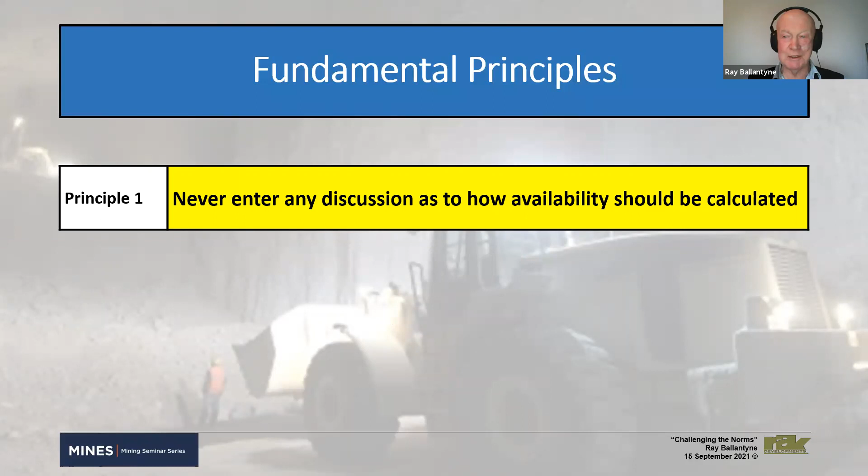With that, we'll get going. People who've worked with me will know I have two fundamental principles when it comes to time usage, availability, and that sort of thing. Principle one is never, ever, ever, ever, ever enter into any discussion as to how availability should be calculated. And principle two, stick to principle one at all times. No, I'm not really joking. This is an incredibly emotive topic, and if we start the conversation we end up all night and not coming to a resolution anyway.

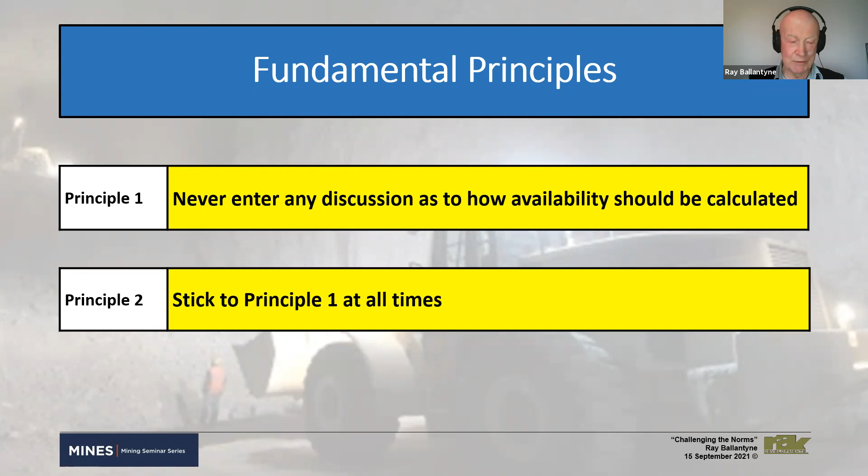So let's look at some reasons why this is such an emotive topic. I think the fundamental one is that we use equipment KPIs to measure people's performance. The maintenance managers are measured on equipment availability. The operations managers are measured on equipment utilization, or tons per hour, meters per hour. So we're using our equipment time usage model to measure people's performance, and that immediately introduces an incentive for people to bias the outcomes of the models.

So they bias the way data is captured. They play with the structure of a time usage model and change formulae for calculation. I don't know how many of you have been through the experience of having consultants come on site and say, oh, we fixed the availability. They just changed the way it was calculated.

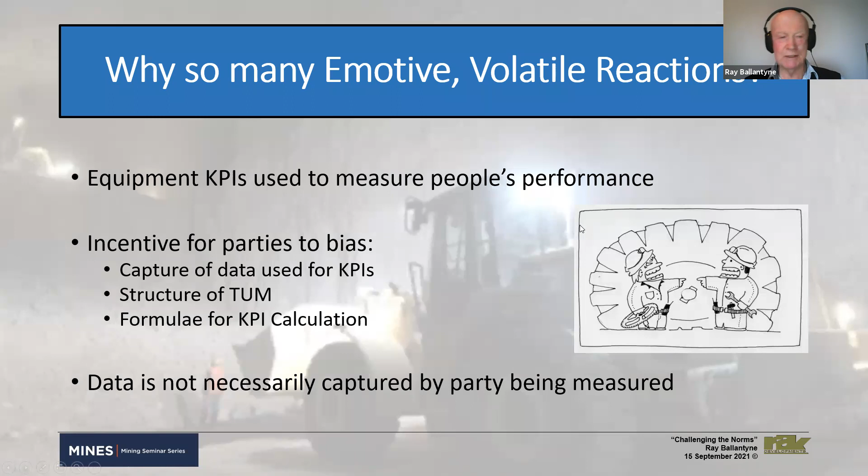And the other big thing is that in many cases, the people being measured by this data don't actually have control of how it's captured. So our poor maintenance man might be measured on availability, which is captured through a mine control room or dispatch system that's been run by operations. So there's a lot of incentives for people to break whatever model gets set up.

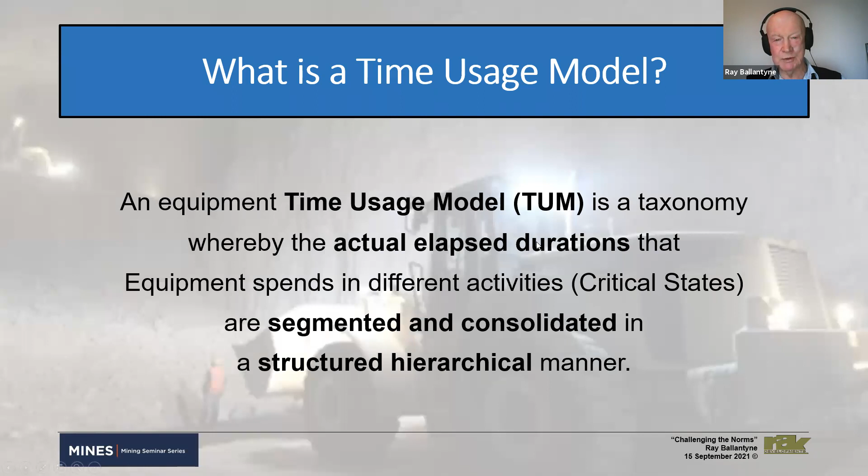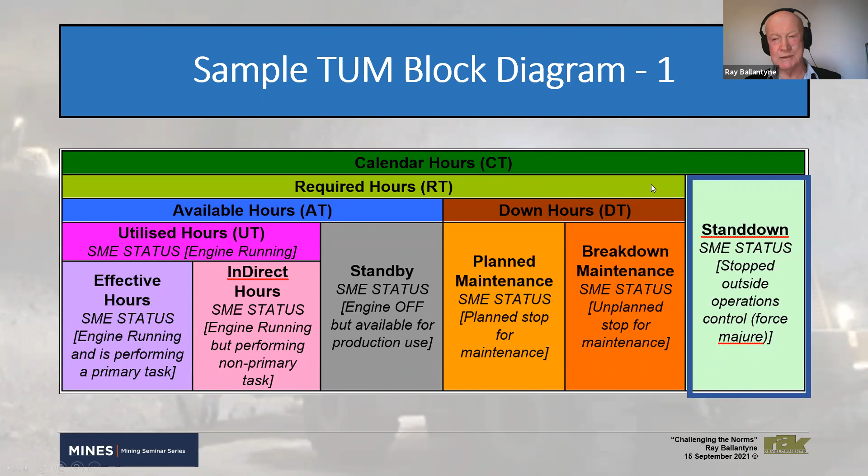Here's another one. It has an interesting little quirk in that the maintenance, or what they've called downtime, is duplicated as contract maintenance or non-contract maintenance.

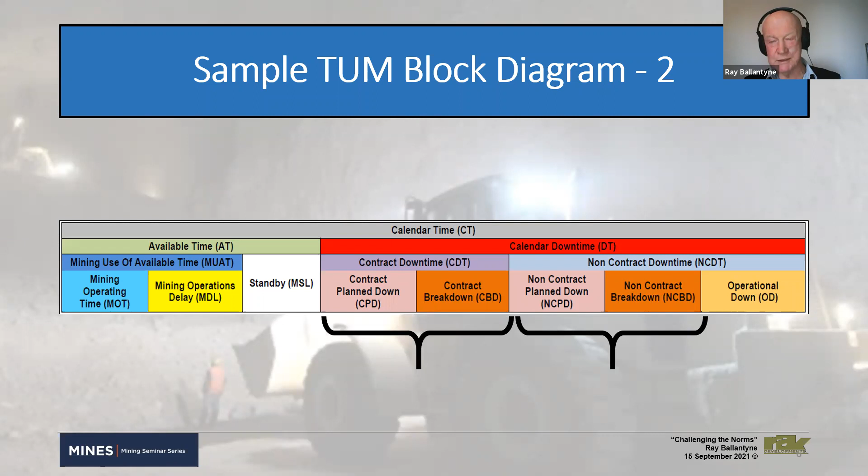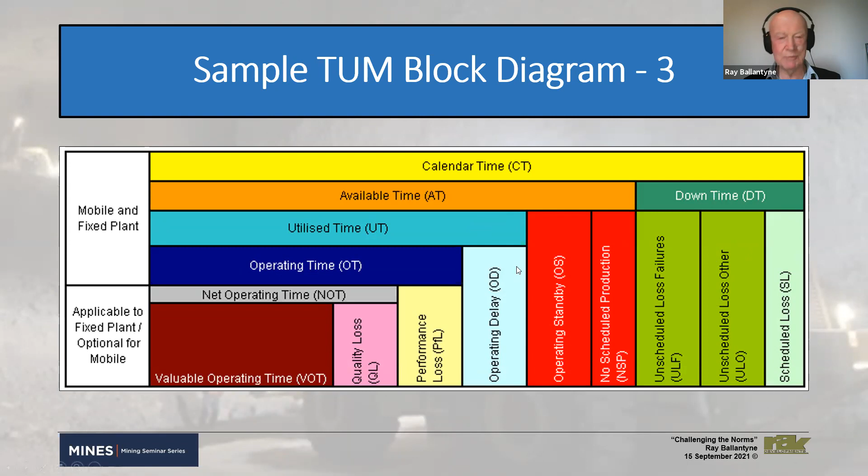So why do we need a time usage model? I struggle to articulate this actually, and I've asked many people.

It defines the rules for calculations. We can get alignment between stakeholder groups, and we can have various systems singing to the same song sheet. A number of people I've talked to about this topic said time usage model is an essential part of interoperability.

I don't know, some of you may have seen the paper that Colin Farrelly and I co-authored back in 2015 for Amira on interoperability. It's another hot topic.

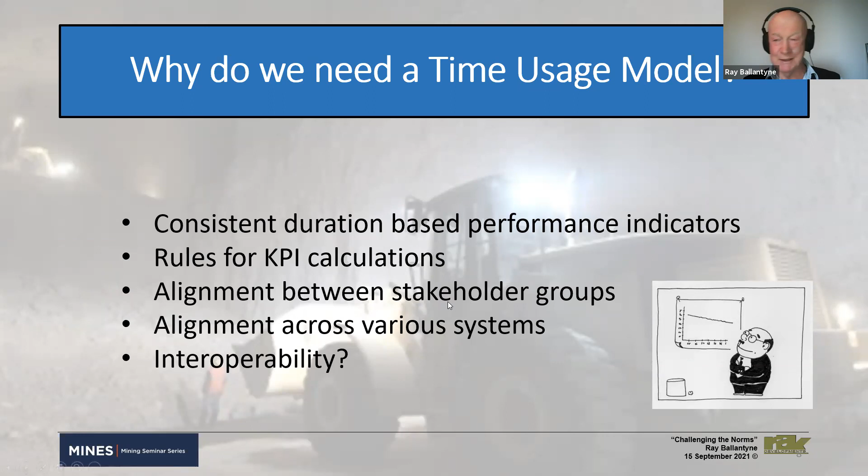I'm going to digress a little and have a glossary here. The word time gets used in many different ways in these discussions. I remember sitting in a meeting a few years ago where a young engineer had been going on about, I can't get the times, I can't get the times. And it took an hour and a half before I figured out he was actually talking about the durations.

So for the purpose of this paper, I'm going to try and stick to a standard where the word time is only used to represent an instant in time. And where we've got a duration between two times, I'll call that a period. And when we aggregate a whole bunch of those periods together, I'll call that hours.

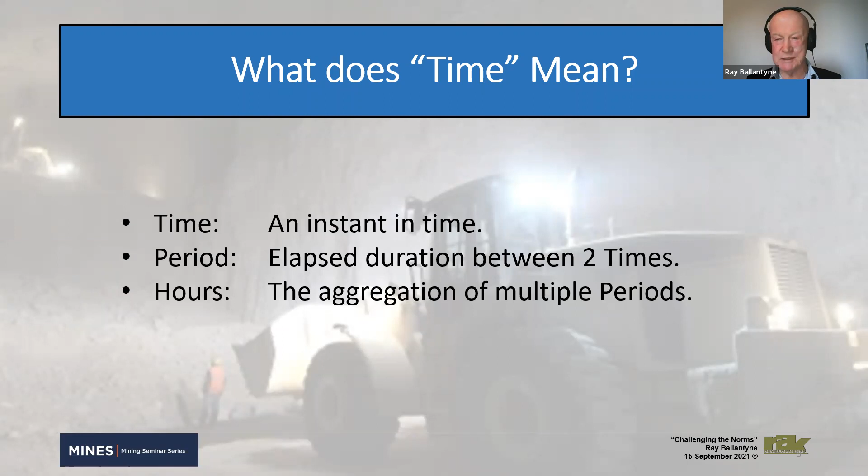In underground mining, we have a lot of constraints that make it difficult for us to collect data. Obviously, communications, both voice communications and data communications. For time usage, I feel we are still very dependent on human intervention, and there's lots of limitations in technology, although that is changing quite rapidly.

I'm going to assert a number of rules throughout the session. So rule one is, when you're designing a time usage model, you must take into account your capability of capturing valid actual data. There's no point in having a complex time usage model if you can't capture the data.

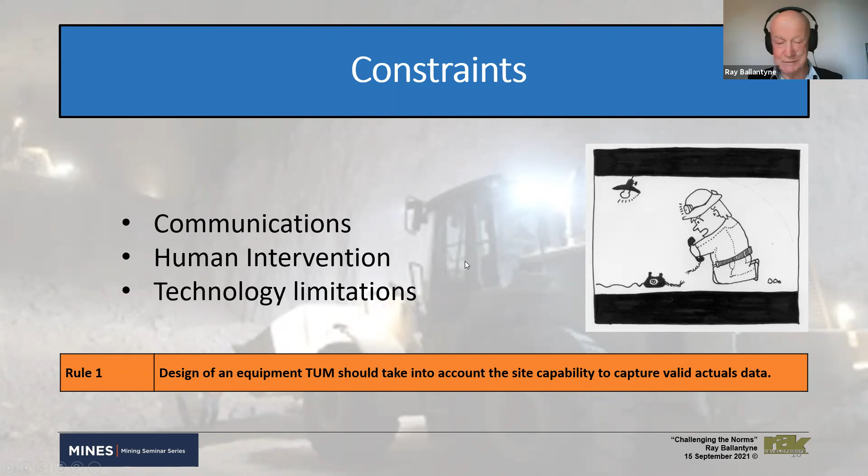We exist 24 hours a day, 7 days a week for 365 or 366 days a year, just as our equipment does. And in some situations, we can record some of those hours, we can't record others. I think it's important to record all those hours. We do have situations where we can't.

For instance, there are still mines in the world that do not work 24 hours a day, 7 days a week. I have a client mine in Queensland that works 4 12-hour day shifts a week, and that's enough to keep the mill busy. But where possible, I really try to capture equipment hours 24 hours a day, 7 days a week. For the purpose of this discussion, I'm not going to deal with those mines that don't work 24 hours a day, 7 days a week. And so recorded hours and calendar hours will be synonymous.

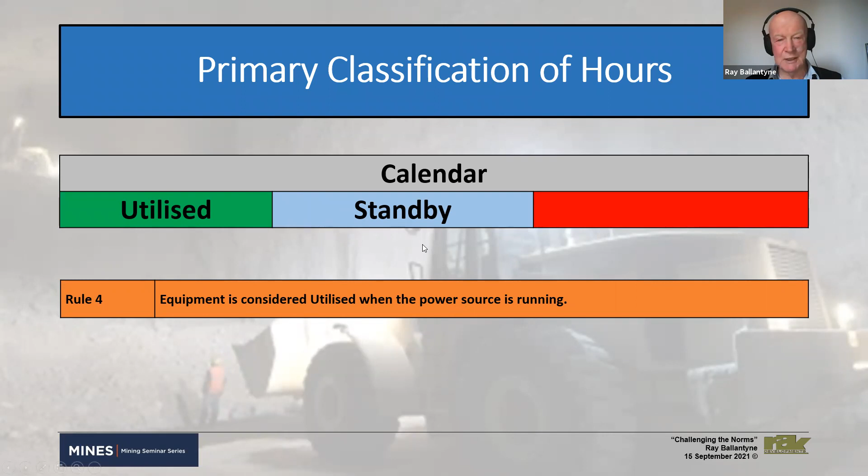Standby - so this is my basic rule for utilized. Standby, I have a rule for that too. It's when the equipment is not being used, it's not turned on, and operations are entitled to take it and use it.

Going back to this differentiation between utilized and standby, with battery electric vehicles we're seeing a practice of using seat time as the measure for whether equipment is utilized or not.

And I think that's going to break down as we go more and more to autonomous equipment. So it's not an easy differentiation to define. Standby, fairly simple - it's not turned on, but you're allowed to take it and turn it on.

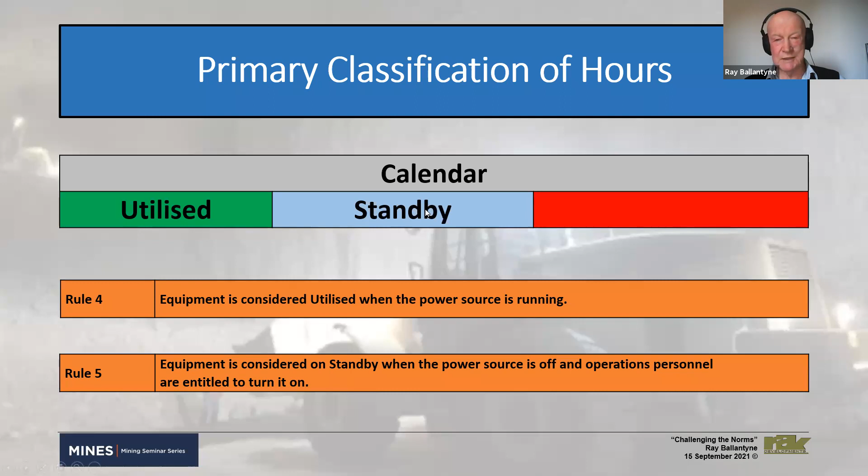And we'll move on to the red box. Now, we can't even get agreement on what we call the red box. It's often called downtime. It's sometimes called maintenance. I'm in the school of thinking it should be called maintenance.

I was in a workshop recently where a very experienced maintenance manager that I have a great respect for commented that a category in the time usage model should not be given the same name as a department. I sort of understand that, but I'm going to stick with maintenance for now.

Then the question becomes, do we include all maintenance? We'll talk later about this area called opportunity maintenance, where repairs or work is done on equipment when it's not required by the operation. I would argue that that's maintenance and belongs in the red box.

And does this box only contain maintenance hours? It's not completely clear cut.

I would argue yes, but you have examples like a chute in a fixed plant and the chute gets blocked. Is that part of the red box? Or is that an operational cost? So nothing's black and white.

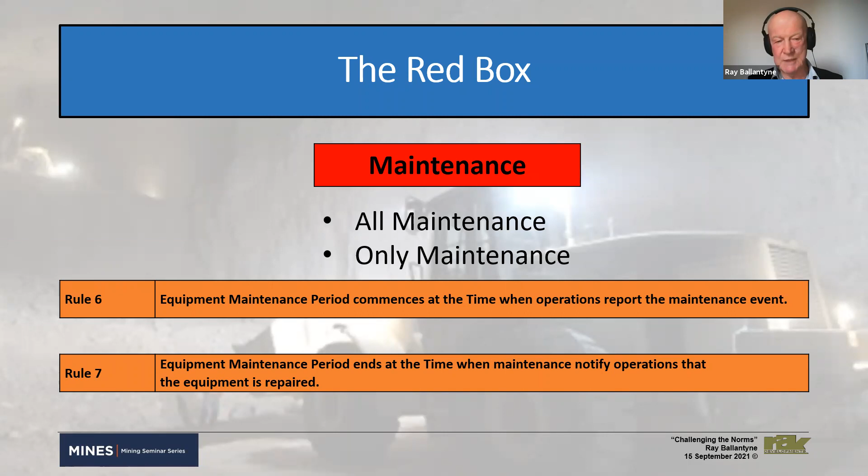So once we have these three boxes, we can do calculations like utilization, availability, and utilization of availability. And they should all sum to calendar hours rigorously.

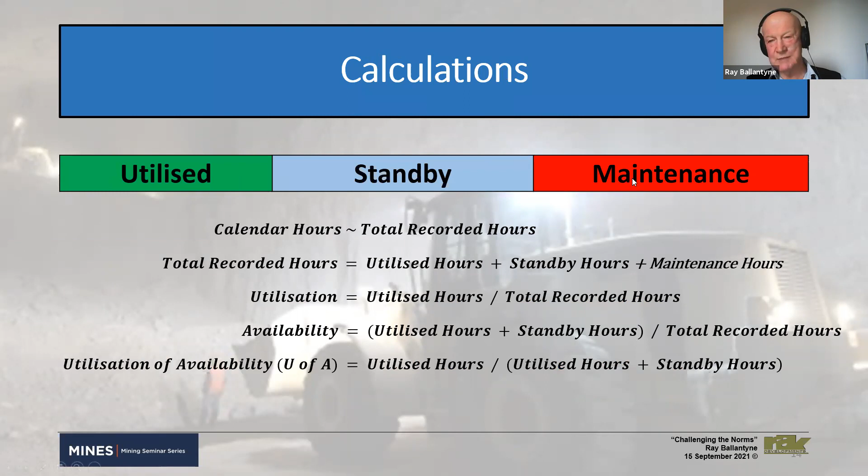We then tend to try and break up these boxes into subcategories. Under utilised, which basically is when our engine's running or using power. I've used a very old terminology, I think it originally came out of Caterpillar.

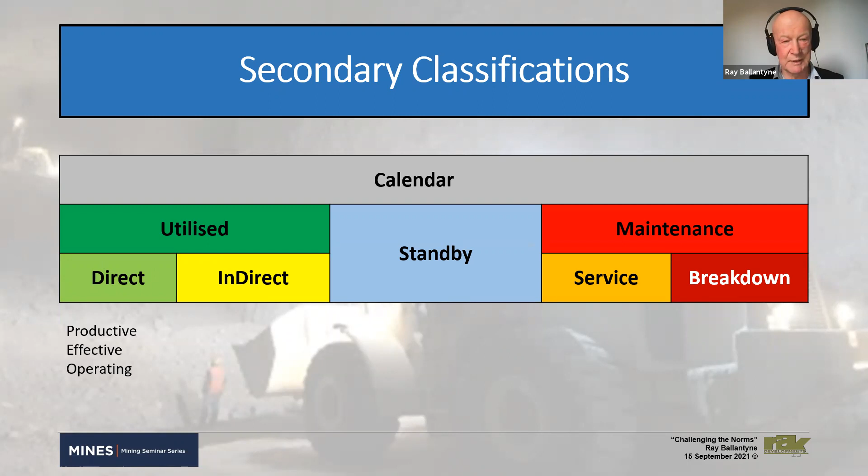Direct operating hours and indirect operating hours. Direct operating hours can be called other things, productive, effective operating. This is when the equipment is doing its primary job. And in underground, equipment can have more than one primary job. For instance, an underground jumbo can drill face holes for blasting and can also drill bolt holes for ground support, so it can have two or more kinds of direct operating.

That's a bit of a differentiation between open pit and underground. Typically in open pit, most equipment will have one really prime task - shovels load trucks, trucks haul, and so on. But in underground, it's quite typical for equipment to have more than one primary task that it does.

Indirect operating - this is still under utilised. This is when the equipment is working, so in our crude model, its engine is operating, and these are the things it does that are not its primary job. Now it should be stressed, these are essential. So in underground, our biggest one is traveling between workplaces - the jumbo completes one heading and travels to his next heading.

Many places regard loaders, boggers, muckers, scoops doing a cleanup as part of the indirect. I've seen various different names used, non-productive operating. The word support is actually quite good, but unfortunately in underground it would get confused with ground support.

Moving on to standby. Standby is actually quite simple - there's a really limited number of reasons why equipment is not working. No work, no operator, no access, no services, and a few other things. And then we have some process things like lunch breaks, shift change, meetings, and of course emergencies. There's not a huge number of reasons why a piece of equipment is in standby.

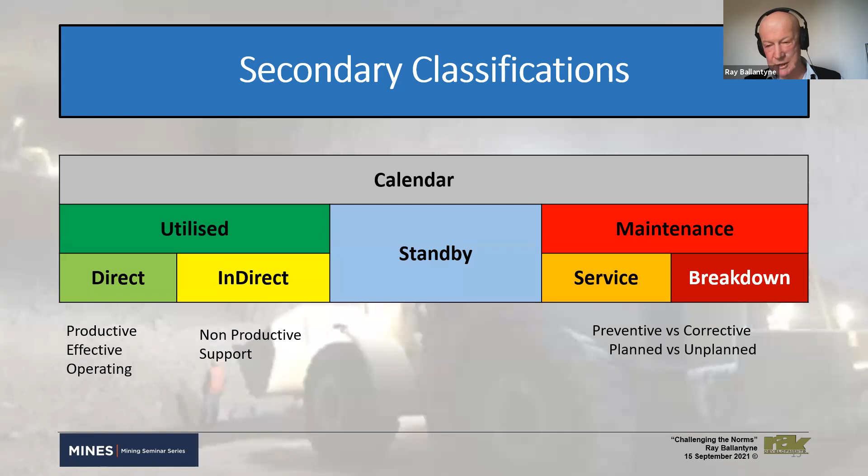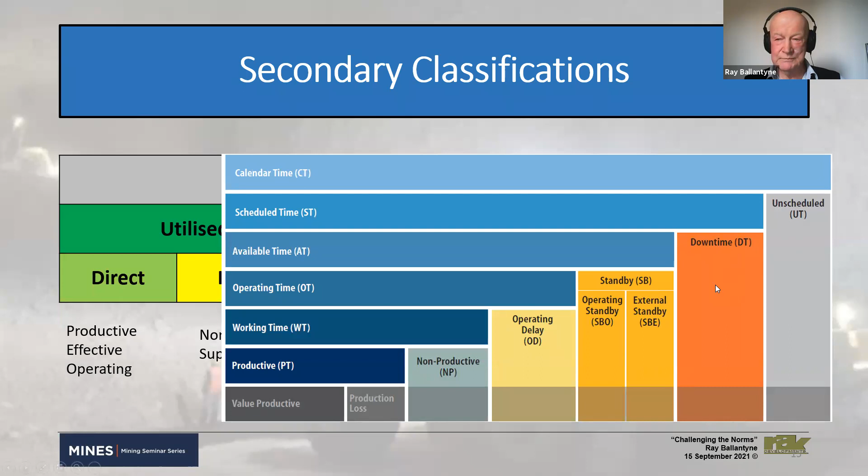The word delay. I don't like the word delay in the time usage model. I suppose I've got to justify myself for saying that.

In the classic open pit dispatch systems, the original Modular Mining and Jigsaw and some of the children that have come out of that, delay has a very specific meaning. It's a short stoppage that we have a fairly confident estimation of its duration, that we can feed into the dispatching algorithm to reassign trucks. So in that sense, it covers a subset of these. That's one definition.

If we used a product like Cat MineStar, the word delay is used to apply to all of these. So we've immediately got two different definitions - it starts to get confusing. Now you'll find in a lot of time usage models, the yellow box is called delay.

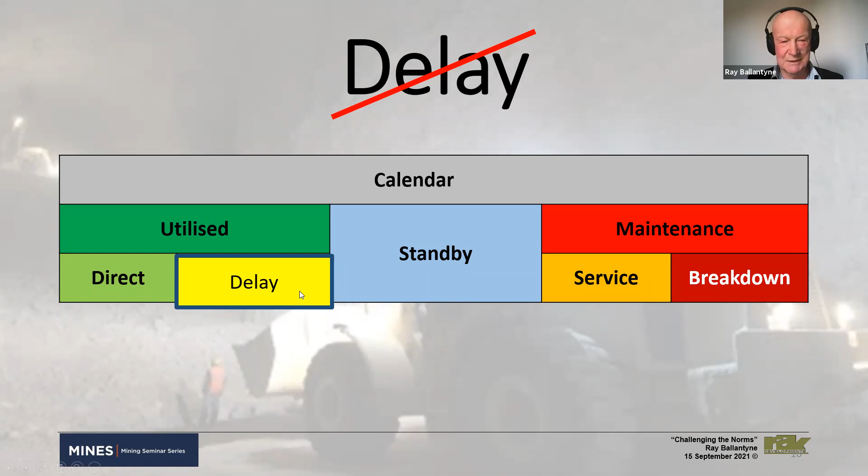I'm going to argue against this on the basis that these indirect tasks are things that have to be done - they're not a delay, they're part of the operating cycle. I also had it expressed very articulately to me by a very good mine manager who said, my best loader operator is the one who does the most cleanup, and I don't want cleanup to be called something negative like a delay. These are not negative things, they're positives - they're things we have to do as part of the cycle so we can do our direct operating. So we'll cancel delay out of that box. I'll assert a contentious rule that we shouldn't use the term delay in time usage models.

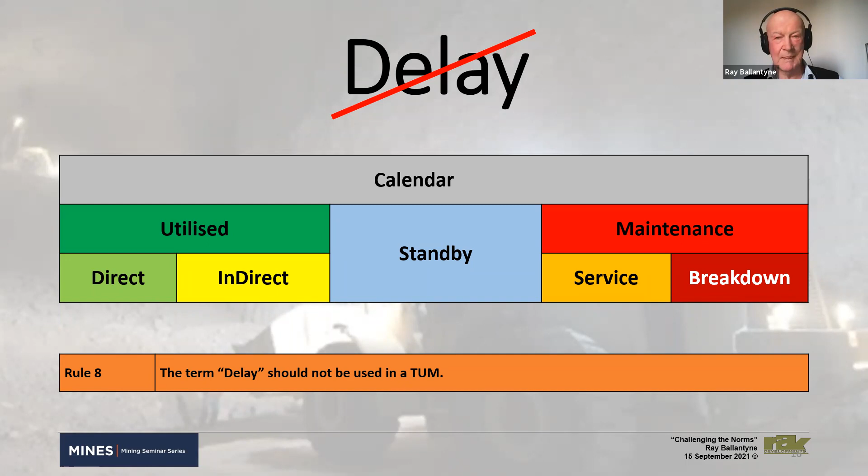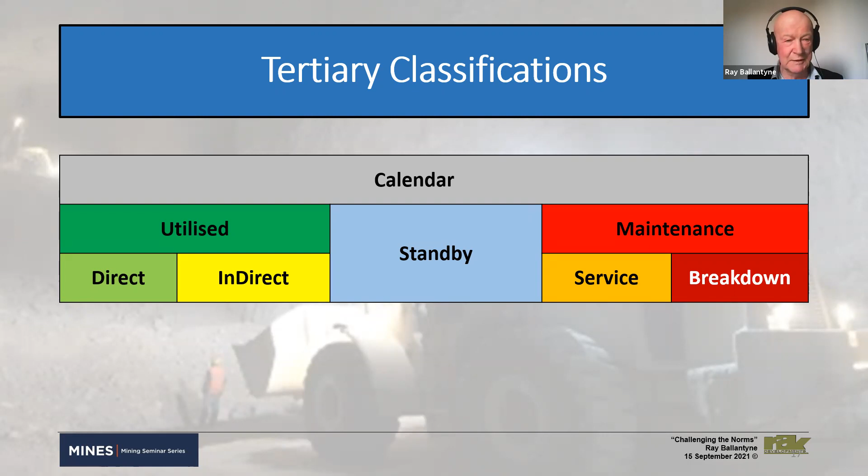Okay, then we try and drive down into more detail. So I've taken a set of detailed statuses which roll up into these boxes from a site. I haven't edited it, I think they're reasonably good. I tend to use them as my first pass when I'm setting up a new site. These are for underground - you would use a slightly different set for open pit. So these are a bunch of direct operating statuses.

The top one, the generic operating, is in there, I think, just to accommodate the particular system they were using. It's come from the history of open pits. We have the situation where equipment only really does one job, so by saying it's operating, we know what job it's doing.

Underground, say for instance a loader - in Australia they're called boggers, and we do bogging rather than mucking. It can be bogging, mucking, or loading. It can be teleremoting, it can be doing backfilling. So at the top there's 101, 102, 103, and 104 - three different primary direct operating categories for a loader. And then 105, 106, and probably 116, 117 all belong to development jumbos.

So each type of equipment would have a few of these, and we would typically expect in underground that most equipment would have more than one direct operating category it could be used for - transmixer trucks being used as water trucks and so on.

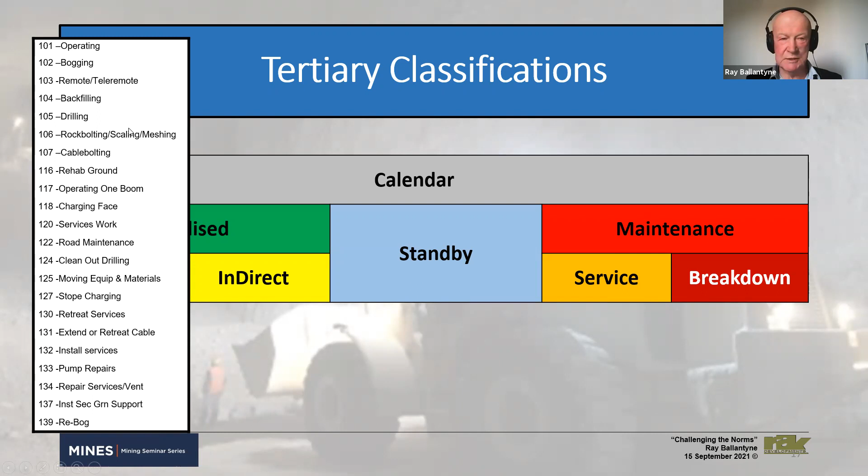The indirect - the big one is traveling or tramming. Cleanups I've mentioned, setting up, rigging down, cleaning equipment. Typically, if the engine's running, it would go in this box. If the engine's not running, then we'd probably put it into standby.

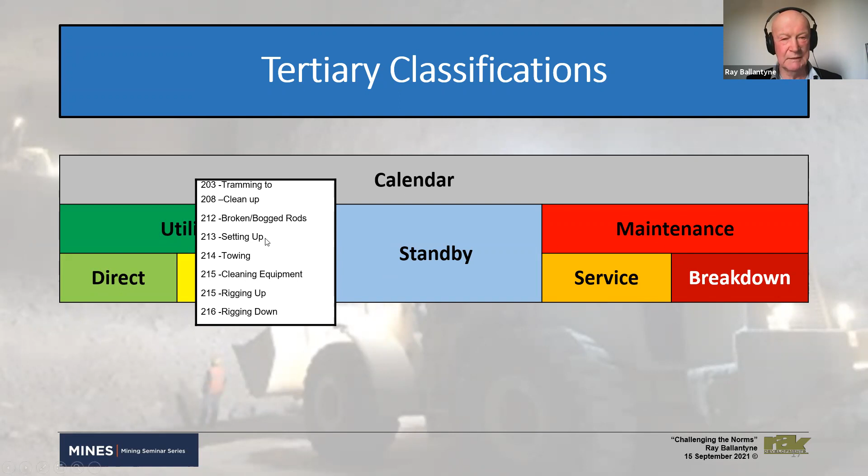Standby, as I said, there's not a huge number of them, and we can group them. We've got the equipment's not required - so there's no work, no operator, no materials, no services. We can have process things like shift change, lunch break, meal break, crib break, safety meetings. So only a few, and we've expanded out into a few subcategories there.

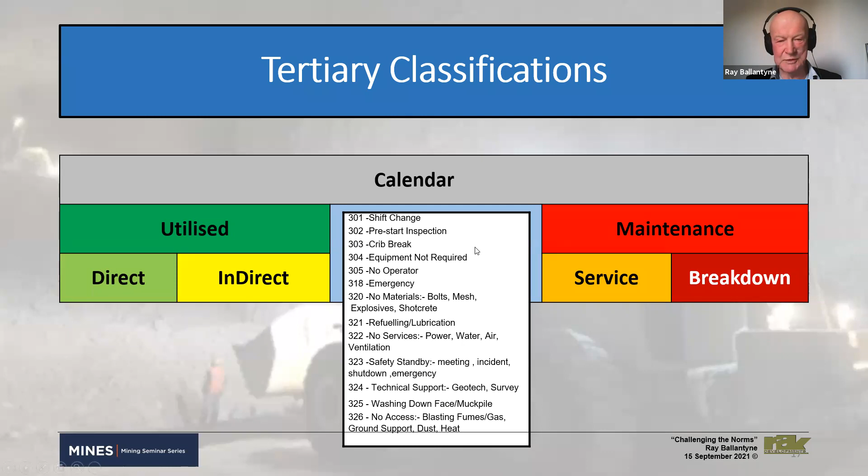Maintenance - going with my division of maintenance into service and breakdown, we can have services that are duty cycle based, or periodic. Typically, because there's no meter on a jumbo drill that tells how much work it's done, drills will be serviced on a periodic basis, whereas most other equipment will be serviced based on its hour meter.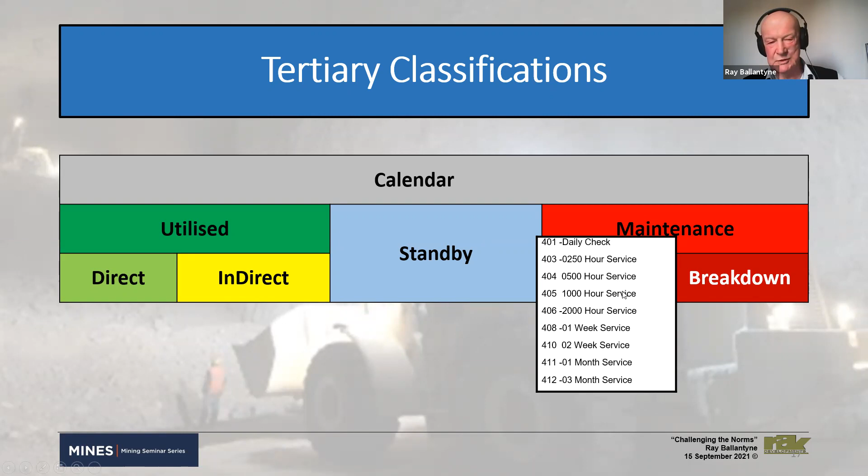And breakdowns - here's a list. I think there's an absolute maximum list, so it's all subcategories of the equipment itself. Most equipment items would only have a few of these, and a greater portion of them are for drilling equipment.

Little horror story: I had a client who had a very large company with multiple sites, and an overzealous maintenance manager came up with a list of 196 breakdown codes to be collected by the control room. He rolled this out very diligently across 3 mines. Three or four years later, I did some analysis for them, and I found that of the 196 detailed breakdown codes, less than 50% had ever been used, and 90% of the hours recorded were against just 15 of the codes.

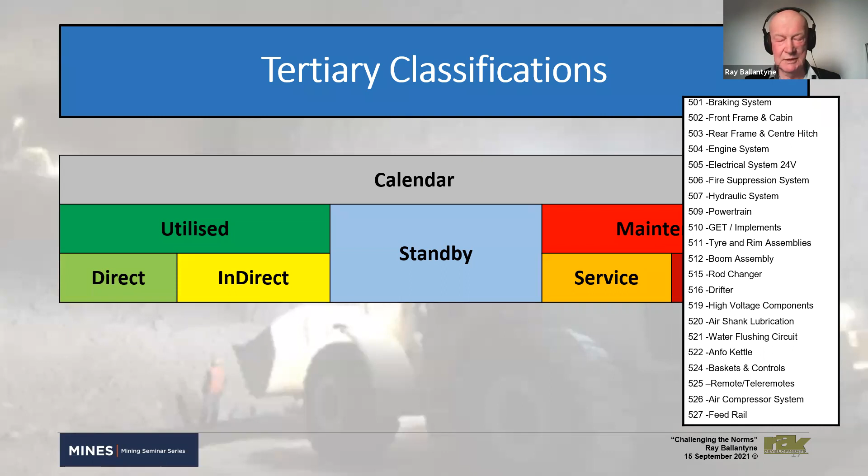So I would really advocate that you don't try to go for too much detail. This, I think, is an absolute maximum in your time usage model - we'll talk about more detail further through the talk. There's about 70 codes there, and I think for an underground mine site that's about a maximum - somewhere between 50 and 70 should be the upper limit.

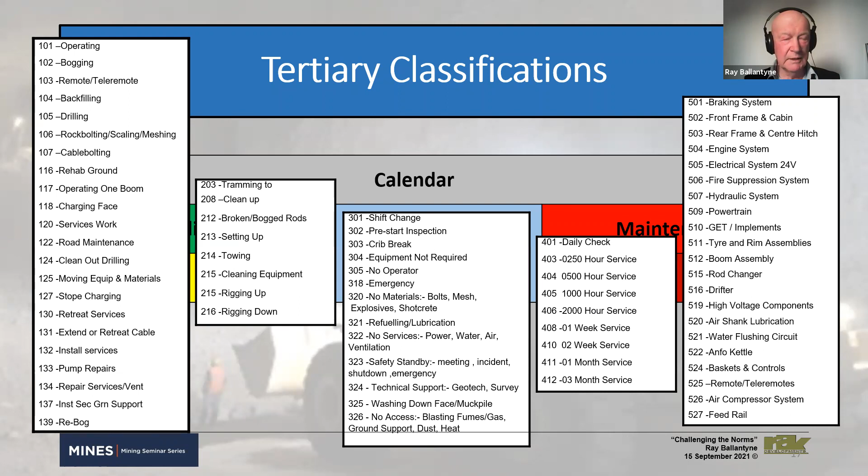So that's the end of the first part of this discussion, where we've gone back to some first principles and tried to develop a simple, basic time usage model. Now I'll repeat rule 1: you always have to take into account that you need to be able to capture the data you're trying to consolidate for measurement.

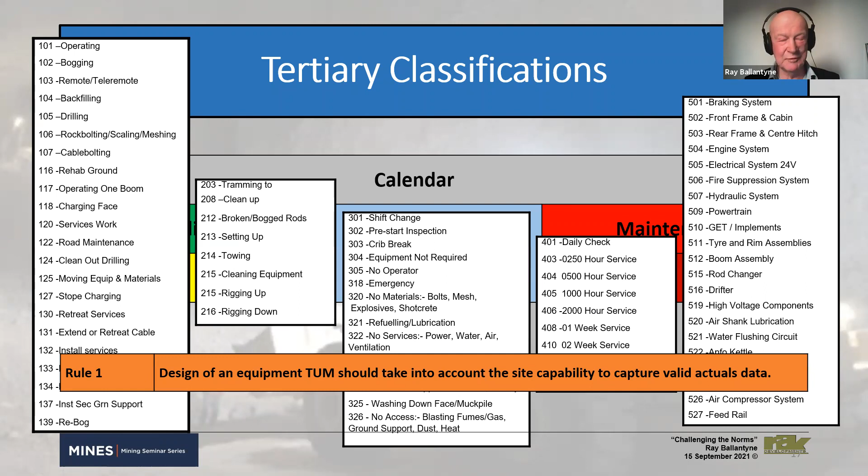Now I'll move on to what is the basic theme of this paper - that our systems haven't kept up with our thinking, and there's lots of things they're weak in, and we need to start pressuring the vendors to catch up.

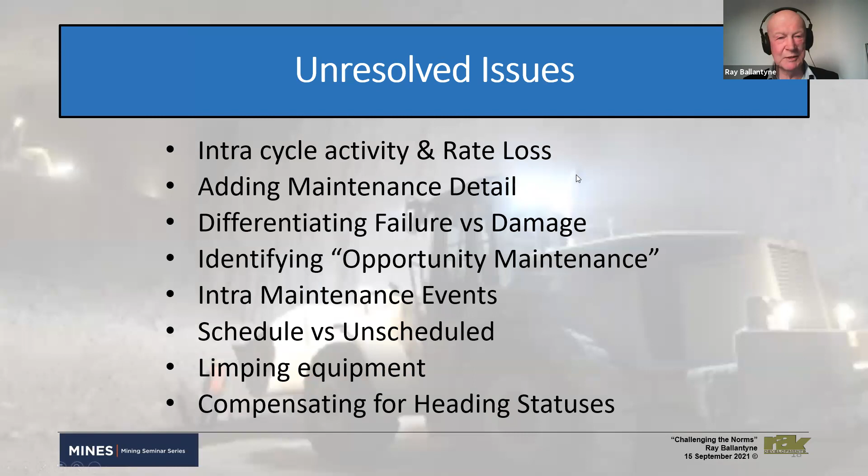Now, I hope there's no underground people in the room who'll throw things at me, but I'm going to use an open pit example in the next couple of slides. Open pit is a long way more advanced than underground in capturing data automatically.

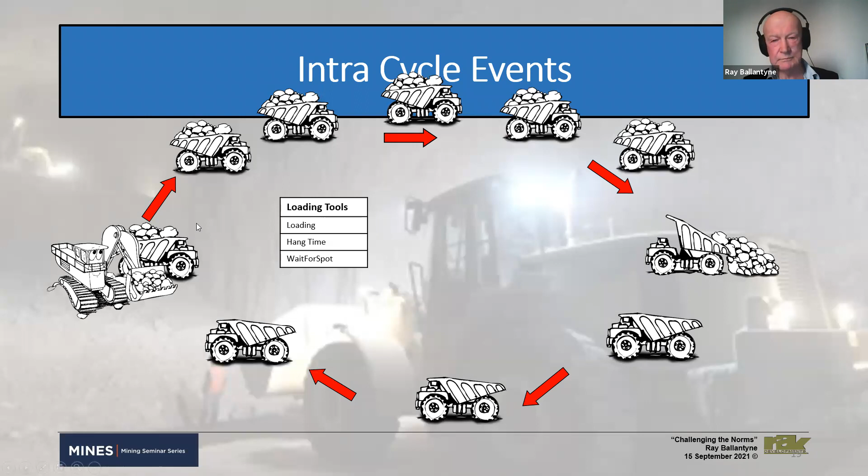So here's a simple truck cycle. One of the major open pit dispatch systems I've worked with can automatically generate events from the truck and loader interaction and the truck behavior. They have some mandatory simple events for the interaction between the truck and the loader, which is recorded against the loader or the shovel. And then they have a bunch of events recorded against the truck, generated automatically.

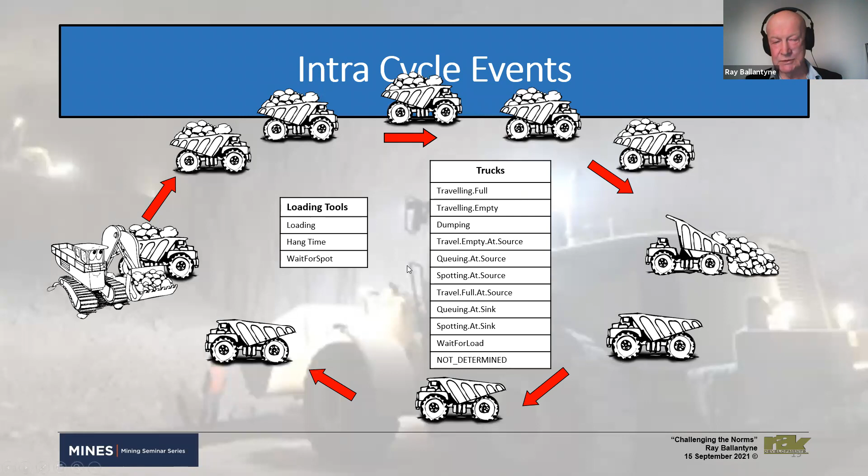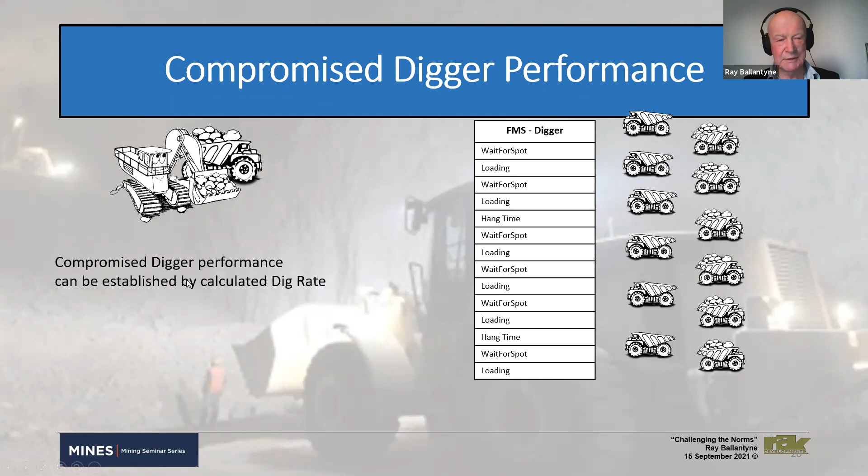So I want to go in and do a little worked example on this. If we have trucks coming and going from a digger, this is a list of the timestamped events that are automatically created for the digger, the loader, the shovel. Now we can see that the digger's performance is compromised by looking at his live dig rate, but nothing in this list of events tells us why.

Typically, we would go back to the digger operator to tell us why he's not performing. In this case, the digger was in hard digging. The blast hadn't worked well, and that condition endured for this whole period. So on one hand, we've got a series of timestamped events about what's going on at the digger, but it doesn't tell us why he's got compromised performance.

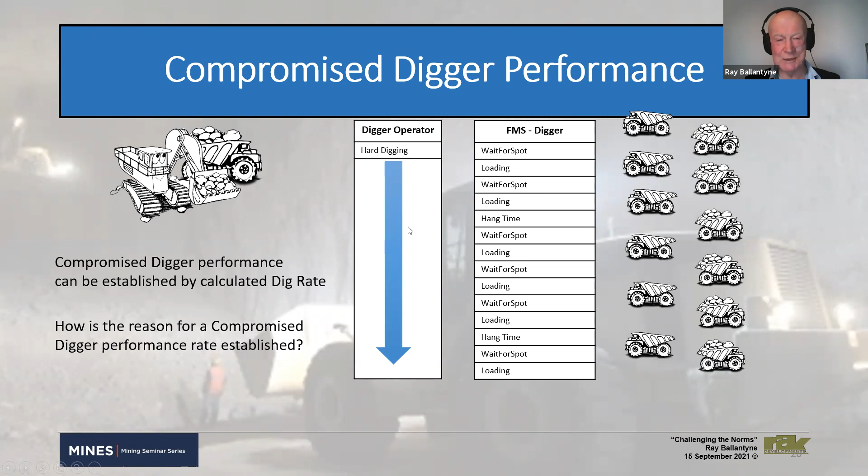I only know of one of the major systems that actually separates these two out, because if we put these detailed FMS digger events into the timeline for the digger, we lose the ability to have the overriding high-level event and its duration. So we're starting to build up a picture where there could be multiple layers in this. I'll move on to maintenance because it comes through stronger there.

So I'm going to assert that these detail events should not be part of the main line of the events for the equipment.

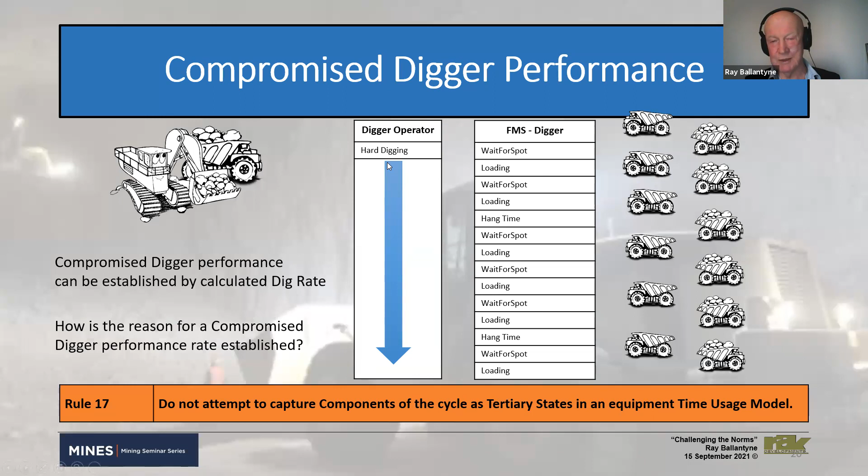So maintenance events, we can have an event recorded. On 10:43 on the 20th of April last year, an operator called from truck 305, I've got an engine problem. Now, typically, most sites will want to know more about that engine problem and want some detail. Unfortunately, the equipment operator generally is not the person to provide that.

So it's quite common to have a list of subcategories under each maintenance category. In this case, the mechanic or the maintenance supervisor goes out to the truck, has a look, and says yes, the problem is a radiator.

I'm going to argue here that this is adding information to this event. We've got a raw event that's been captured and we're adding further information to it. This information can be generated at a later time than the event occurred, but it's related back to the time of the original event. So we're adding information, we don't overwrite the engine event with radiator. And this gives us immediately two levels of reporting.

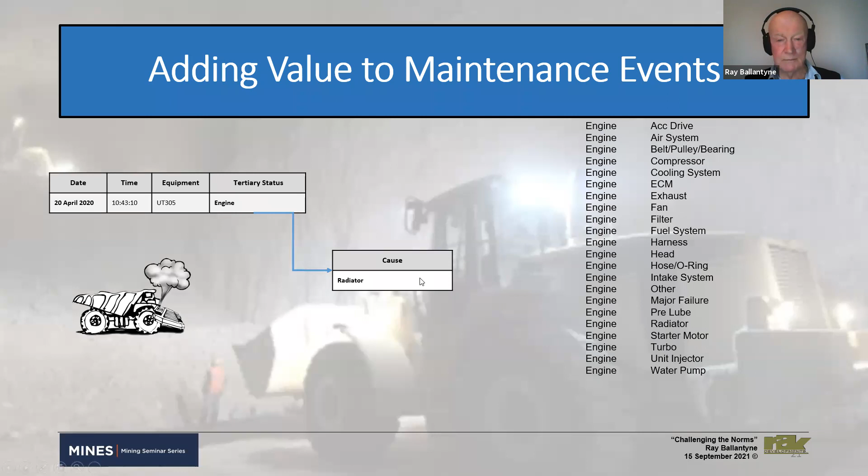So I'm going to argue that the detail of maintenance should not overwrite the original tertiary status. We need a facility where we can add value to the original status, and most of our systems do not offer this capability.

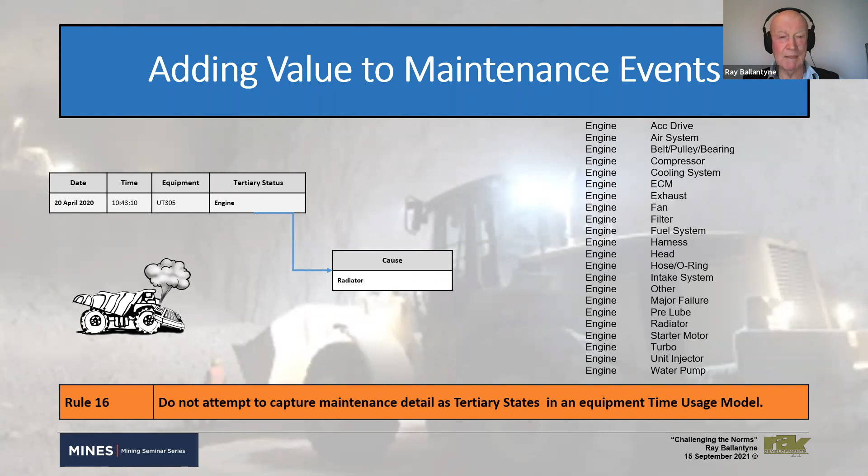Similarly, extending this concept, there's always the big argument between accident damage and failure. Here's an example of a site that had a code for accident damage, and so anything that was accident damage was recorded as accident damage. We don't have a lot of information there. We don't know what the accident damage was and what the maintenance resources to fix it would be. So I'm going to argue that we don't do that.

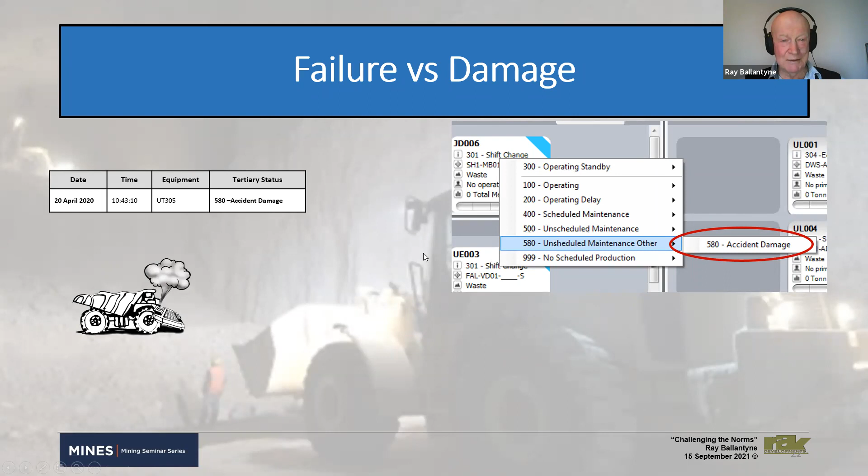We have our state from the previous slide where we had an engine problem reported, it was a radiator. Then we can have a process, and this can occur later, the next morning, of arbitration between operations and maintenance. I'm told this picture is wrong, they should be standing back with fists clenched, ready to thump each other.

And come up with an agreement, whether it was failure or damage, and add information, flag the original event that it was damage. And really, I don't know of any of the major systems in the marketplace that do this.

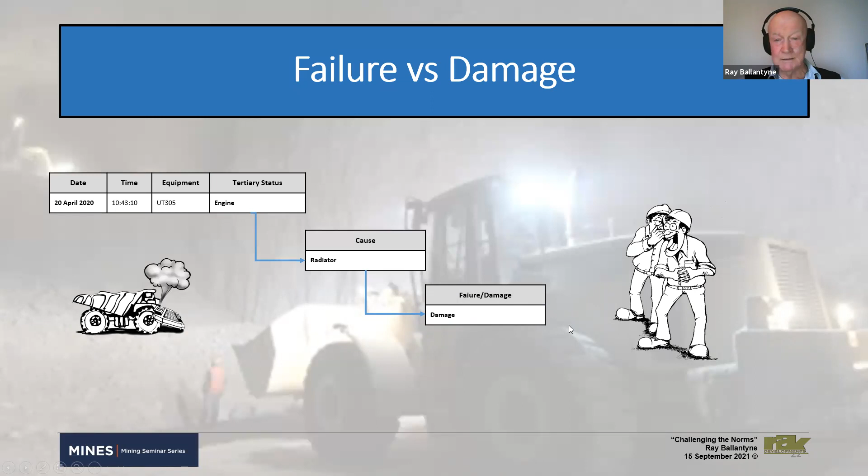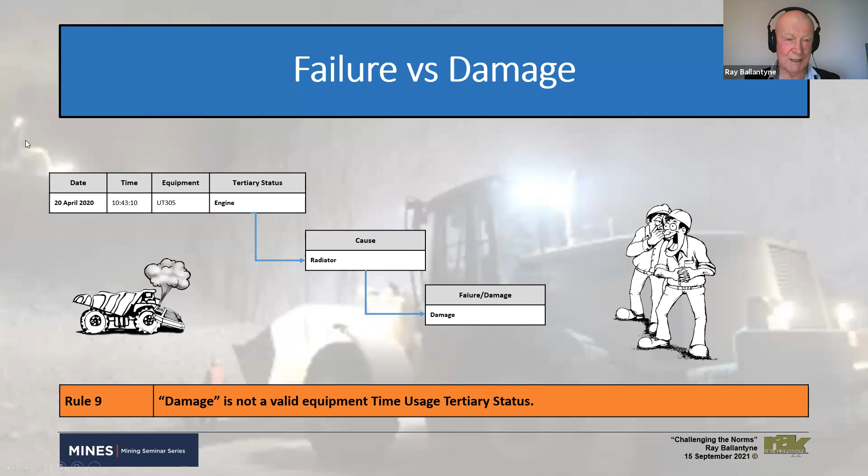Heading off down the same path, we'll have our assertion: we shouldn't have damage as a tertiary status category. We should stick with our regular statuses and then flag that event. And again, this information will be added a day later, but attached to that original time that the event occurred.

We have this thing called opportunity maintenance that people tend to go on about. In my earlier statements, I said I felt the red box should be maintenance, should be all maintenance, and should be only maintenance. So it's a case for identifying whether maintenance is carried out in a time, or a period, that doesn't impact the operation. That's typically called opportunity maintenance. And in some indicators, it's excluded from maintenance for availability calculations, etc., and that can be quite valid to incentivize people to coordinate maintenance work with the operation.

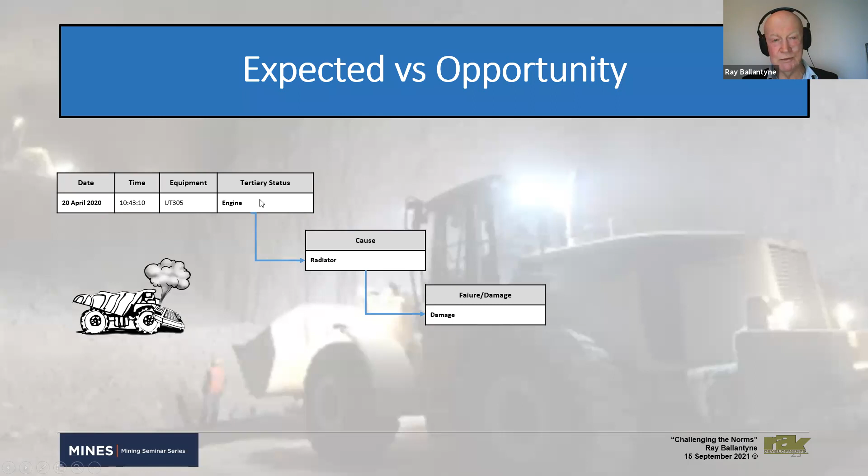But if we have a status of opportunity maintenance as a tertiary status, we lose what our original maintenance event was about. So once again, I'll advocate that we have a process of arbitration between operations and maintenance and agree that this was maintenance done in an opportunity, that is, when the equipment was not required by the operation, and we flag the event. This belongs to the original time-stamped event, but it means we can report and extract what maintenance was done in an opportunity and what was done in regular maintenance time, without compromising the information we've already gathered about that breakdown.

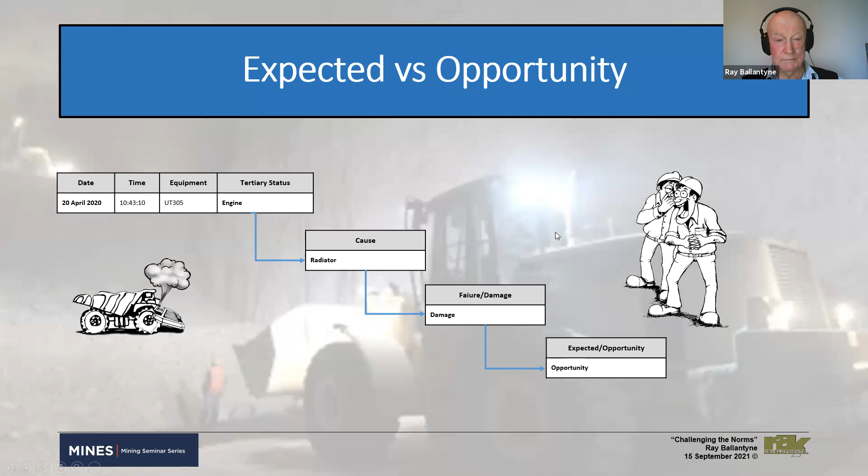So I'll assert a rule, and as far as I know, none of the major mine control systems have this capability.

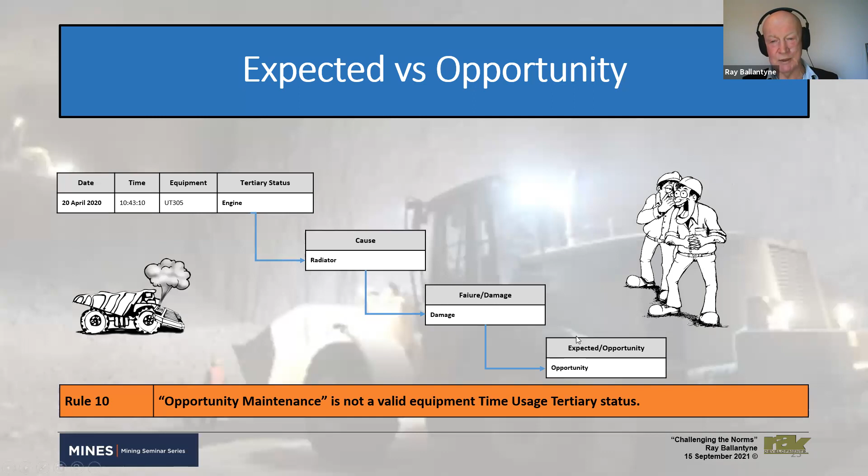So straightening that picture out a bit, we've got a maintenance event that occurred. That was an engine radiator, it was damaged, it was underground, and you backed into a rock bolt. The truck wasn't needed, so it was fixed in an opportunity. Now, this event for the vehicle endures until it's fixed and back on the go line.

There's a whole lot more happens in between. I call these waiting events, where we've had our major event and we've been able to add value to it, but there's this parallel set of events that occur, which are sub-events. So traveling to the workshop, waiting to be assessed, being assessed, wait for parts, wait for labor. We all know those things on remote sites.

These are important, and people want to know these, and people want to know these in real time. But if we put them in line with a single linear timeline, we lose the whole duration of the event.

Most of the systems handle this in some form. I don't really think that's handled well in most products. They tend to put all these events in the single timeline and then flag them out for mean time between failures calculation. I think it can be handled a bit more adequately.

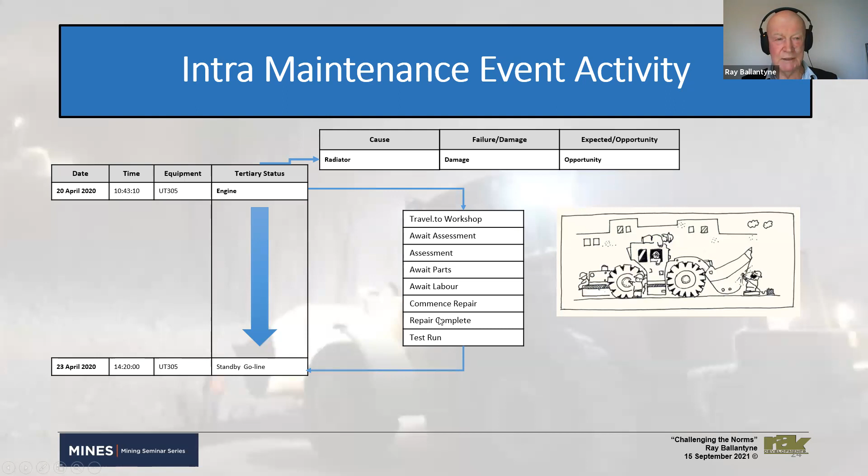So we still have a gap in our landscape of systems, which doesn't allow us to add information in many of these cases. So I'm going to say the waiting statuses shouldn't be tertiary statuses. They should be handled differently, but they're very, very important and people need to see them. People even ask for them to be displayed in real time.

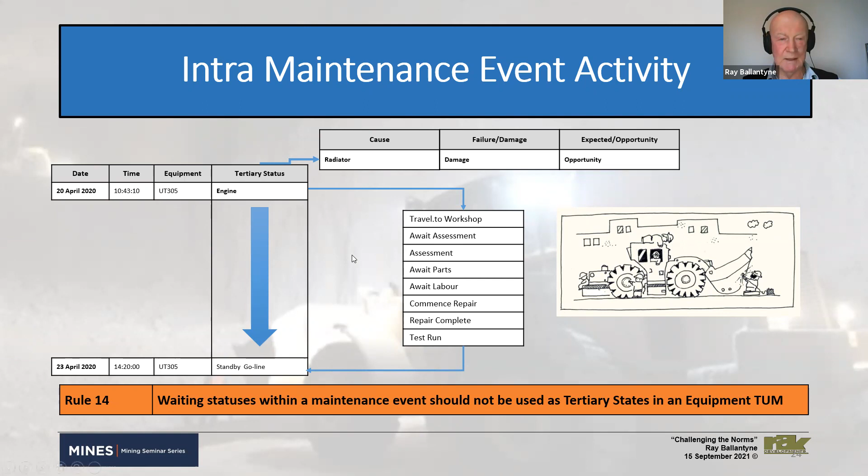I think schedule is a different dimension from what we're talking about in a time usage model. It's important, no question about that. I'm trying to articulate why I don't think it belongs in a time usage model. Came up with a couple of things. The schedule's about the process, where a time usage model's about the equipment. The schedule is about times, it's about when, where the time usage models, we're consolidating all those durations.

And I think the best example is if we take a jumbo that's drilling at a face, he's in a schedule window and he's drilling away quite happily. The schedule window ends. What changes for the jumbo? Absolutely nothing. He just keeps drilling till he's finished the heading.

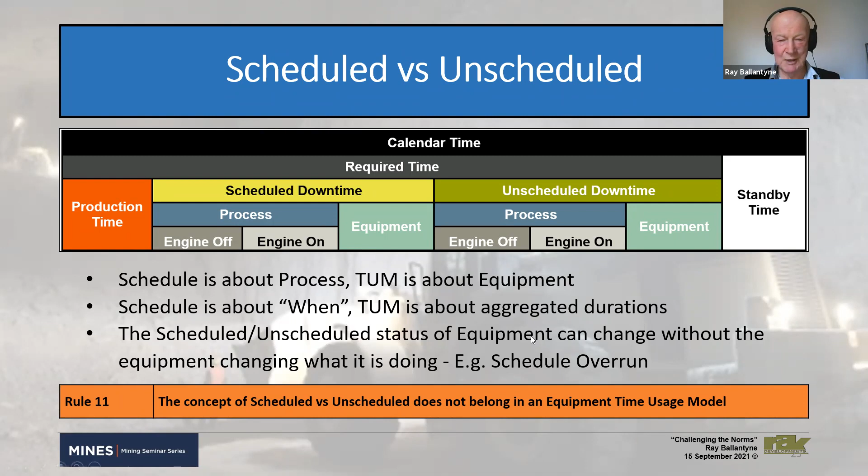Limping equipment occurs both in underground and in open pit. Underground, we have jumbos that have multiple booms, usually 2 booms, and one boom can become unserviceable and the jumbo can keep operating at a compromised rate for the other boom. In open pits, we tend to have electric hydraulic shovels that have 2 engines. One engine becomes unserviceable. It can still keep operating, but at a much lower rate.

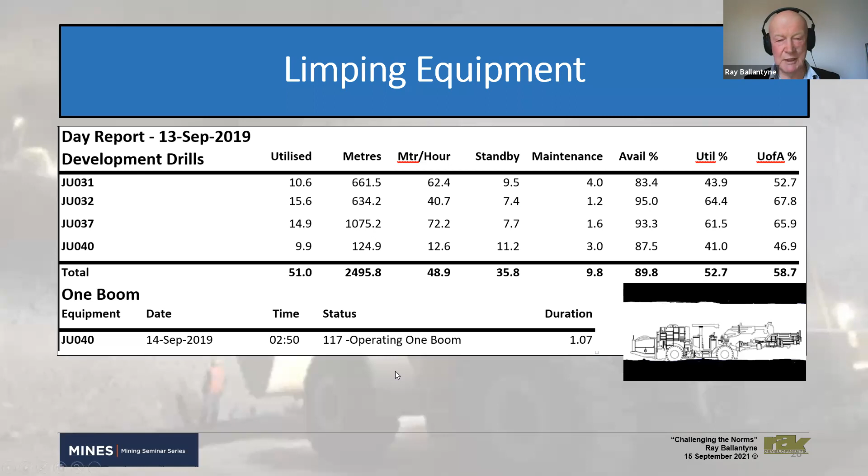I really don't know, and I've never seen a good way of handling this in time usage models. I've come up with the argument that if we have Jumbo 40, it's got a very low rate here, and it was because Jumbo 40 was operating with 1 boom. So my argument is that when we have equipment that is operating in a compromised manner, we should always, when reporting its performance, we should report why it's compromised.

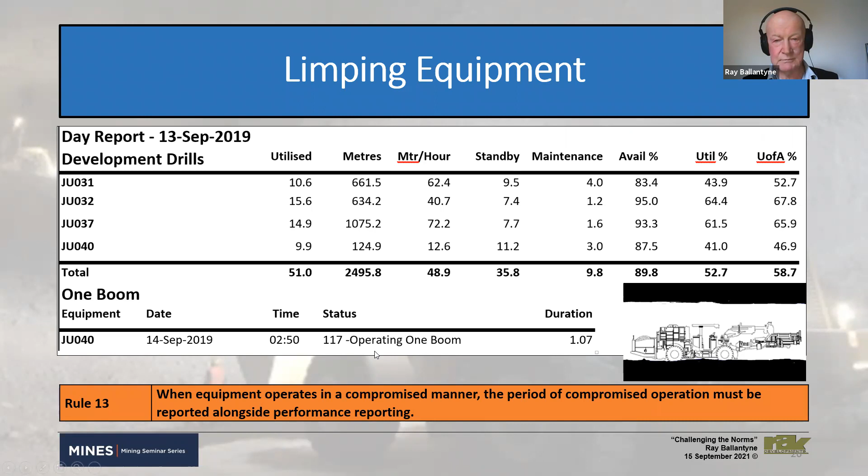A little one, especially for underground. Most of the systems that have come into control rooms in underground initially started in open pits. And underground is far more mature in the way it manages locations as assets. We need to know heading status, effectively where is the work. But that doesn't happen to the same extent in open pit. So these systems that have sort of morphed into underground from open pit typically don't handle location status very well.

And what that's led to is the sort of workaround of trying to use equipment statuses for a location status. But waiting for a geotech assessment is not an equipment status, it's a location status. The equipment status should be there's no work.

So I'll argue that we shouldn't try and use equipment statuses to manage location statuses. We can have quite a strong relationship between them. For instance, when a jumbo completes drilling out a heading and departs, we can automatically generate a location status that the heading is now ready for charging. So there's a close relationship between equipment statuses and location statuses, but equipment statuses are not location statuses.

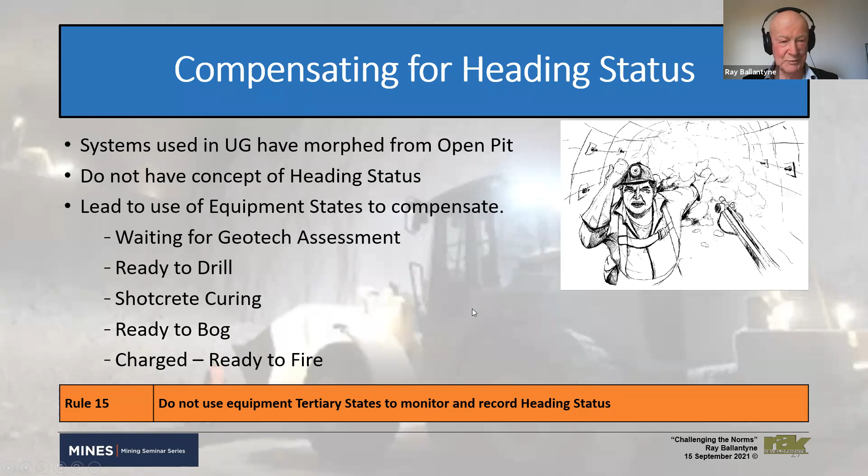So to summarize, with equipment time usage models, we unfortunately give people an incentive to bias the data. I was in a meeting recently and someone asked me, how can we fix the time usage model data? And I said, get rid of bonuses. We haven't got completely automatic capture of status data, so we're depending on people and then we're giving them incentives to bias the data. I'm not sure how we're going to solve that.

I mentioned too much detail. You should only have in your model the amount of data that you can actually capture. And I've gone through a number of areas where our systems that are available to us are inadequate at the moment.